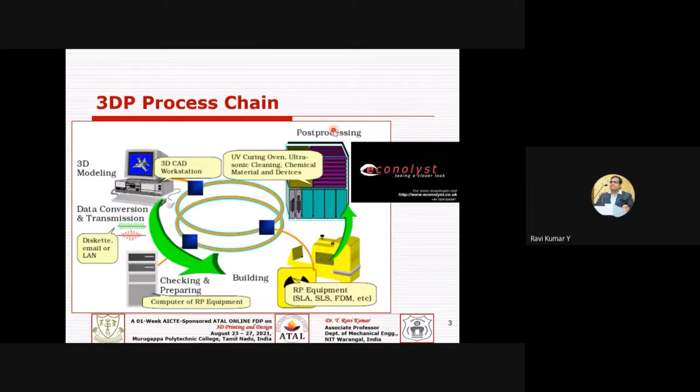Let's elaborate on what we discussed. We need to start with the CAD model, which is the true model or the native representation of your CAD model. For example, .prt or .part, whatever it is, it's a native representation of your model, the true representation.

But at the moment you save it as an STL file, it has been tessellated or approximated into triangles, and you can control the mesh resolution. By reducing your chord height, or reducing the angle control, you can get a more precise representation. That is at the cost of more triangles in the STL file.

Typically it is an STL file, that is the industry de facto standard, right from the beginning. So we need to start with a CAD file with true geometry, and it has been discretized or approximated into a number of triangles, which you can increase by controlling the parameters in your software itself. This is where you start with CAD to STL file, and the next step is we need to slice it.

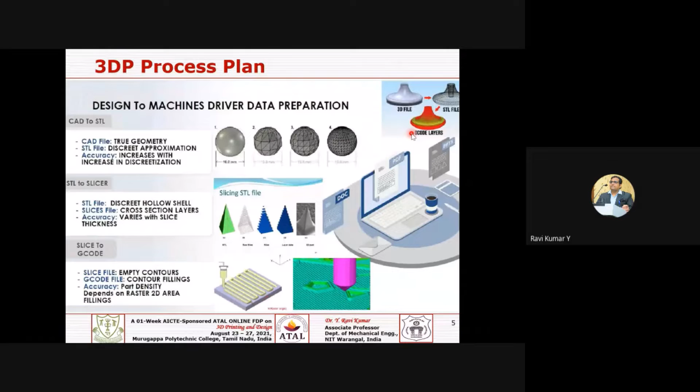This again depends on your layer thickness also playing a vital role. Not only the accuracy, but you need to provide supports here, extra supports. So one can identify or select an optimal orientation in such a way that, without compromising your surface finish, you have a conflict or trade-off between accuracy and build time. Of course we have other criteria to consider, like the amount of support material required in one orientation versus another.

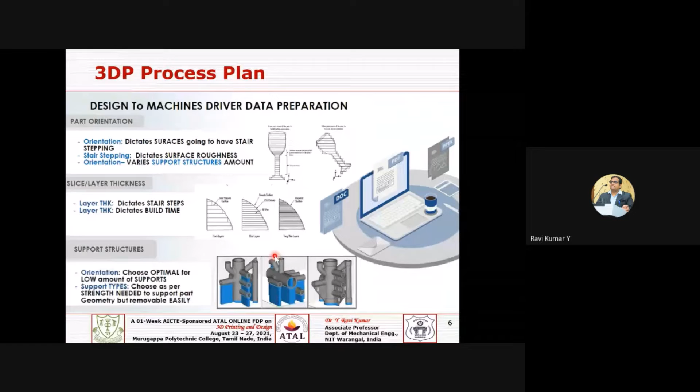The support structure is going to play a vital role even for metal printing technologies. If it's a polymer-based system, you have a different scenario of supports, and if it's a metal printing system, you have a different aspect of how you minimize or optimally utilize the support structure. So these are some of the aspects we can elaborate on regarding part orientation in 3D printing.

We have several criteria for how part orientation is decided, such as the height criterion, meaning your build direction gives minimum z-height, so the number of slices are minimum. If your z-height is minimum, you choose an orientation giving fewer slices — the z-height should be one of the criteria.

Or your surface quality may be another criterion, and the area of the base on which your part is resting, meaning the better foundation, is another criterion for fixing your orientation.

Or you're looking at mechanical properties. Why? Because you cannot expect the same mechanical property if you make one sample in horizontal orientation and another sample in vertical orientation. The mechanical properties never match.

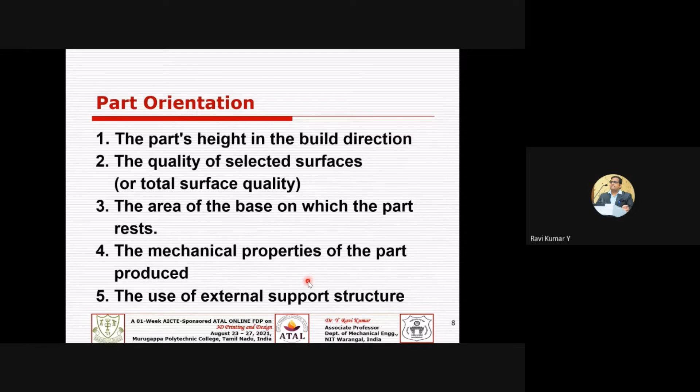So in that case, what could be the optimum orientation for better mechanical properties? And of course, there's your external support structure, as we discussed in the previous slide.

If you take a typical design, you can come out with say 5 different criteria, meaning 5 different orientations. In one orientation it may be maximum area of the base, the better foundation criteria, or it could be minimum area of contact with the supports without damaging your model — because we need to peel out or separate the support from the model, and we should not damage the model in that action.

And even minimum height criterion — minimum z-height means fewer layers, so build time will be minimized — and minimum facet roughness, which is a quality aspect where you can choose another orientation. And we may be looking for minimum volume of support, fixing the orientation based on that.

You may doubt how you ensure which orientation is chosen — software by default may suggest some orientation, normally based on the minimum z criterion, which is more cost-conscious: where the z-height is minimum, the build time is less, and the cost of production will be less. So all of this comes under optimized part orientation.

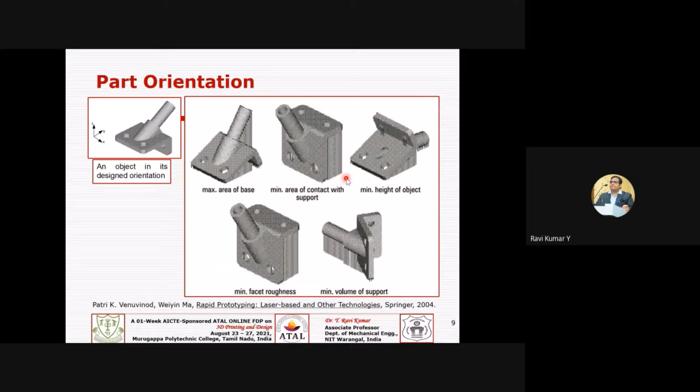If you fix your orientation, your theta angle, at around 45 degrees, and you change the other sample to say 30 degree orientation, keeping the same layer thickness, you can anticipate that the error, the deviation, is much more here than in the previous sample. So one can understand the importance of your build orientation in affecting your surface finish.

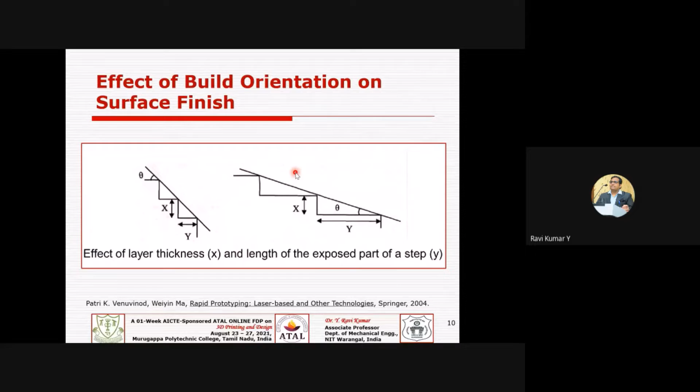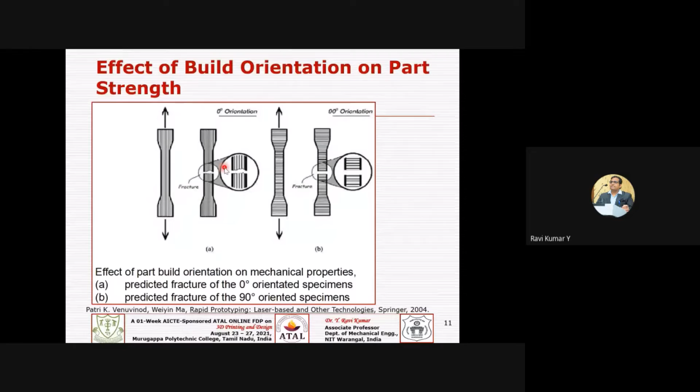So the 0 degree versus the 90 degree orientation, where you have different fracture mechanics. So ultimately your required properties are affected a lot by your fabrication orientation.

And we talk about the cost, the production cost of these 3D printed components. The total cost would be the sum of a pre-processing cost, which includes, say, hiring a design engineer or an application engineer, or software to generate your tool paths, or sometimes, as we were talking about, redesigning some aspects. Your pre-processing cost includes those sorts of costs.

And of course the build cost, meaning the machine utilization cost for building your prototype or your products. And the material cost, that is the model as well as support material cost. Predominantly these 3D printing systems require support structure, 70 to 80% or more, so we need to work on those costs, plus the post-processing cost, as we already discussed.

Post-processing includes cleaning up or removing the support structure, and further improving the mechanical or other physical properties, which incurs a post-processing cost. So maybe furnace treatment or shot peening for improving surface finish and so on and so forth.

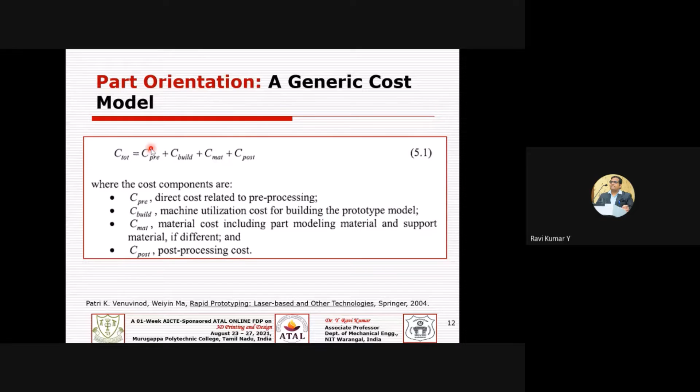Why? Because more or less the machine is automated, so there's nothing much to do on the machine side. Whereas this is the main crucial part of the cycle you do in a 3D printing process. And of course the cost. And then support structure generation, as we discussed, where nowadays this support structure,

I hope the previous speakers talked about various processes, but the support structure will definitely have different outcomes, or it may behave differently. Why? Because sometimes you may work with polymer-based systems, sometimes with metal-based systems, where you have totally different conductivity or rate of fusion of the particles, so with these support structures you may not be able to generalize support structures.

Why? Because each material behaves differently, and sometimes you may use a photopolymerization process, sometimes a powder bed system, and sometimes a binder jetting or a material jetting system or a sheet lamination based system. But you must know about the behavior of the support structure from one process to another.

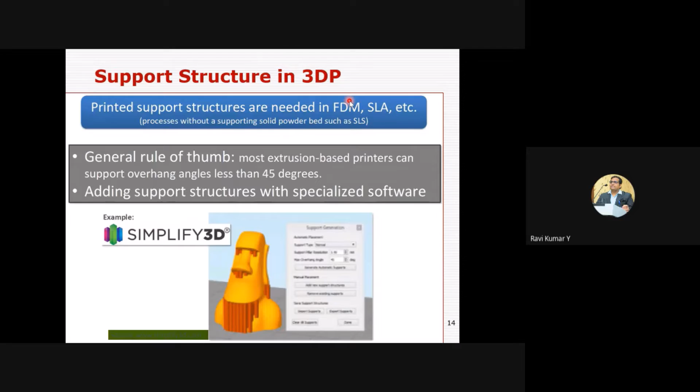And you can come across several softwares to do this job. Maybe Simplify3D, or Cura is another software, which is more or less open source, supporting FDM based or filament fusion based systems. And then if you see the support structures, normally you can divide them into three categories.

The first category could be the separator kind of support, meaning you have the platform where you are going to start depositing the layers. Initially you put some layers, maybe some 10 layers or so, that will directly fuse onto the substrate or platform. You use this kind of separator support where it gives more reinforcement, or a better basement for your part.

And of course you have main supports, which do not directly contact the model, and you have the third kind of support which directly contacts your model material, that is a Sierra or needle kind of support. So you see these supports from different perspectives, and accordingly design and print these supports.

What I'm trying to say is you can vary the infill density, or you can vary the path strategy for different regions. Why? Because you may have a different function for a separator kind of support versus the main support versus the needle or Sierra kind of support. So by considering those aspects, you can design your support in tune with what we need to design and fabricate.

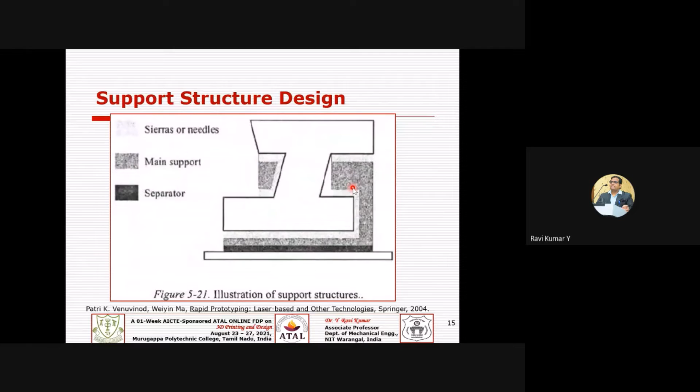And the support structure has not always been a curse for you. Say, for example, you have a separator kind of support here, but you didn't give any support here. Because you have not given a support, you may anticipate some sort of peeling or curling effect of your layers. If you provide some support, you can eliminate this sort of curling or peeling effect with the support structure.

So support structure is not always harming your part; sometimes it may be very much needed. Again, that depends on the type of material and the type of process you are using. Sometimes the support material will act as a conductor in order to dissipate the heat. It may act as a sort of conductor in some situations or applications, so we cannot generalize saying that the support is always bad.

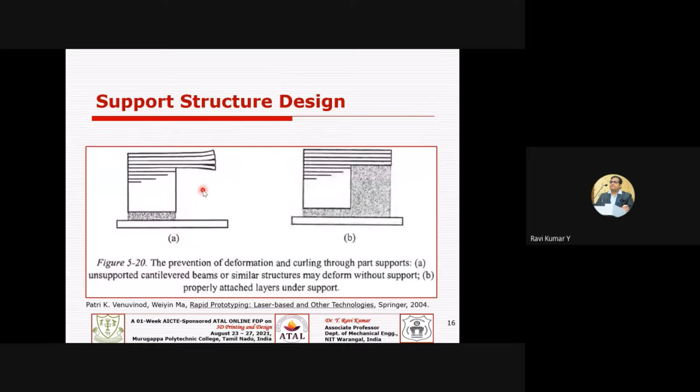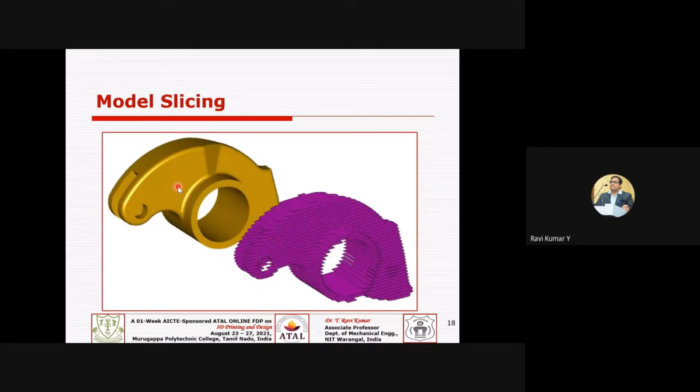And then of course we do slicing and toolpath generation. Once you have set everything, we need to start slicing; your CAD model should be sliced. If you see the mathematics behind this, it is simple math, since we are working with an STL file, which is more or less triangular facets. So it is simple mathematics or geometry involved here.

So of course Z max, the maximum height in Z direction, minus the minimum height in Z direction, divided by your layer thickness, will give you the number of slices that your model consists of. And then how do you get your slice point? Once you use a cutting plane and try to slice it, your cutting plane may be touching one of your triangular facets. Why? Because your model is an STL file. Basically, it is a triangular element.

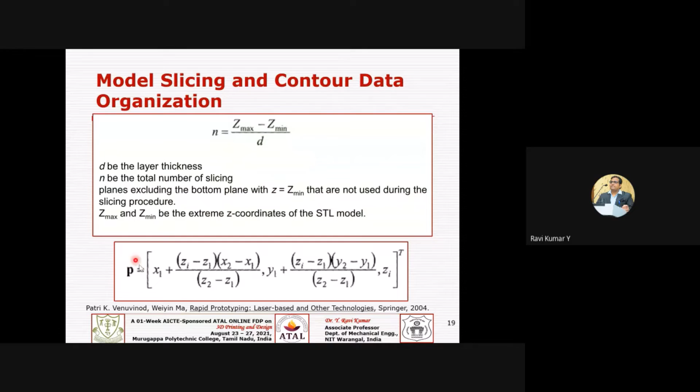So for the triangular element which is intersecting with your slicing plane, you can easily calculate the coordinates of that sliced point, the X coordinate as well as the Y coordinate, at that particular Z layer, maybe at a particular layer number, so you are able to get the coordinates of your slice points. What I'm trying to say is, you have a model STL representation and you have a slicing plane. I'm talking about these intersection points.

So I have intersection point 1 here, for example, 2 here and 3 here, across the periphery. So I have 1, 2, 3, 4, 5, 6, 7, and of course 8, 1 and 8. Only then will it form a closed loop and ensure that it is one contour, or at this layer position you have this cross section. Typically you can have two notations, either clockwise or anti-clockwise, depending on whether that data belongs to the interior or exterior. So initially we can come out with this kind of syntax and semantics.

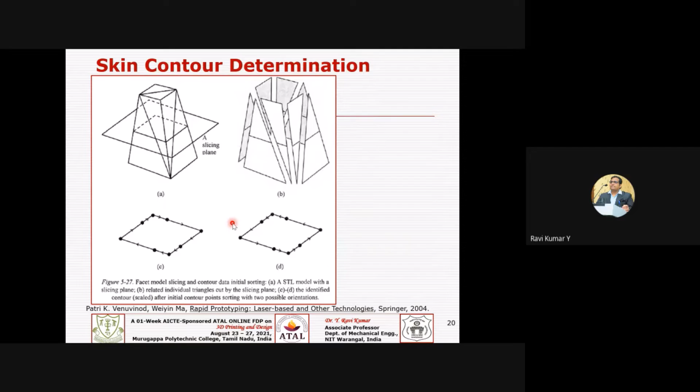Once you get these contours, we need to check for peak features. What do you mean by a peak feature? Say, for example, you're slicing your model and your slice thickness is this much, whereas your feature is of lesser thickness than the layer thickness, the resolution. Then there will be a chance that you will lose this feature; it cannot be recognized. So wherever you have those sorts of peak features, you identify them. You should not lose them.

Then you may adopt a different slice thickness for that, without losing your data. Again, that depends on what layer thickness you are adopting and what minimum feature you can get from that machine, and we need to evaluate that: which machine you are going to fabricate this on, what the resolution of that machine could be, and the minimum feature that you're going to get. So we need to check all those aspects.

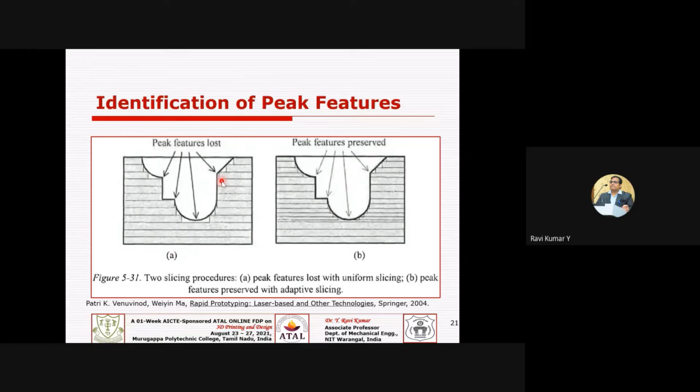Though it is a push button kind of approach, we do agree that 3D printing is all about a push button. You just take an STL file, your CAD model, slice it, and everything is automatic and absolutely fine. But in practice, sometimes you may miss these sorts of features, right? So we have to explore these sorts of gaps that you can encounter.

Once you identify the peak features and have generated the slice points, if you take a particular cross section, a particular layer, you may have several features at that layer. Why? Because it's a combination of different features. That depends on the geometry of your model, of course, and we need to have a parent to child relationship, right? Which part may be the parent and which part could be the child, and how many generations it may go. We need to organize these.

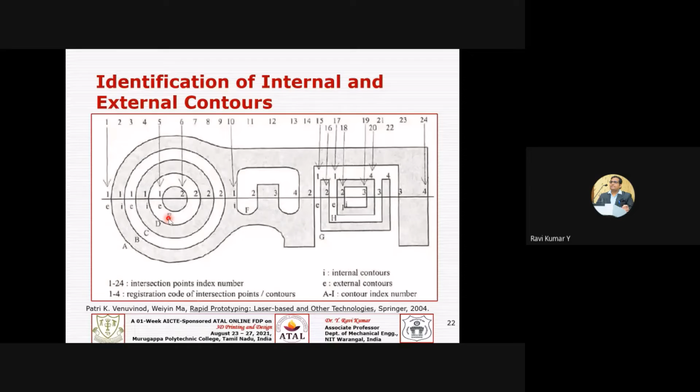You may wonder why I'm saying all this, since your software may be doing it for you; everything will be done and organized. It's fine. So ultimately, the organization of the contours is done for each and every layer of your model. If I have 100 layers, you can anticipate all 100 layers. You organize this data and ultimately we need to send this data, something like your G code, M code data. Now I'm calling this a CLI. This is one of the file extensions you may use. This is basically contour data.

So after slicing and generating the cross-sectional data, now the cross-sectional data is in this format, where it consists of how many layers a typical design has, and the first layer. So it consists of everything, right? The index number, the layer number and the Z coordinate of that current layer. And this starts with the first layer.

So I have some 10 contours at a particular cross section. Then the first contour, I may have the contour number, whether it's closed or open, whether it's internal or external, or even it could be a father to a child, some sort of hierarchy, and the number of contour points for the first contour, and of course the coordinates of that.

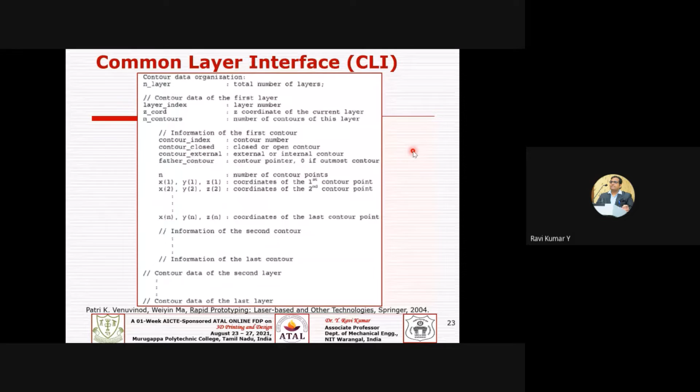So the coordinates of that, and that is one contour, and typically it may have several contours, and the information about each and every contour, second contour, third contour, and the last contour. And that's about the first layer. Then go to the second layer, and the same thing will be repeating. Depending on the geometry you have different contours with the second layer, up to the last layer, right? So this is basically polyline data which is fed to the machine to run the show, right?

Why am I talking about this? Because it will dictate a lot on the outcome of the product, maybe the density or the mechanical properties, which will vary from one toolpath strategy to another. So then it is our job to come out with optimum utilization of these toolpaths. So what is the requirement? What sort of application is your product for, what sort of design requirements, and based on that we need to do all this exercise, right?

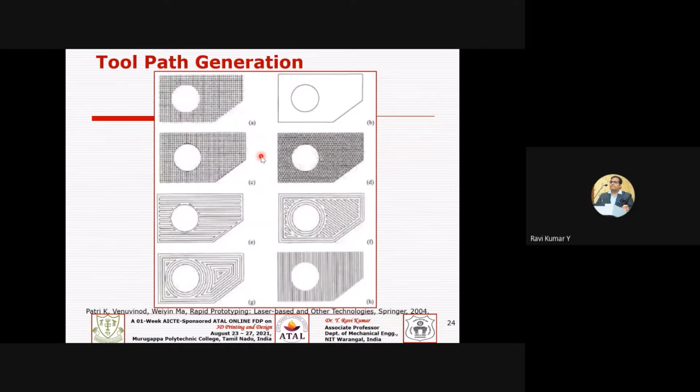So we talk about the mesh repair and slicer tools. Typically, the mesh is a triangular mesh. I'm taking only the STL file, and of course some slicer tools. You can find some proprietary software to do this job. Why do we need an STL editor, or STL modification, or diagnosing your STL file, as we discussed previously? Unfortunately, your CAD system doesn't have this diagnostic mechanism, nor does your interfacing software. So you may adopt some third-party software which will even allow you to do STL editing.

So first of all, why do you want to edit the STL file? As we discussed, maybe some errors, or some text should be put on it, for labeling, visualization, or measuring purposes. You may have a doubt: you can take the measurements on your CAD file, right? You are correct, but you cannot take measurements on an STL file. Once you save it as an STL file, it becomes a static model. You cannot do many of these operations on your STL file.

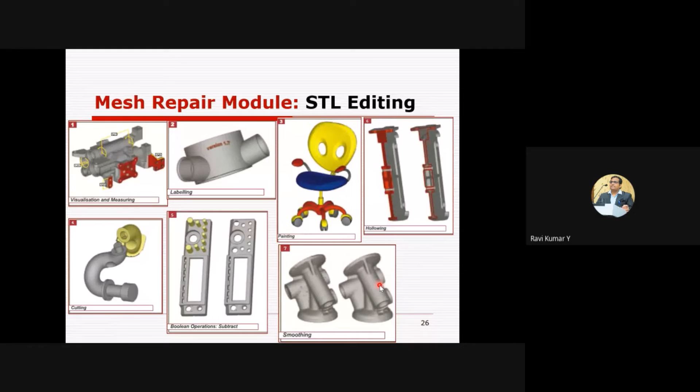It might have been taken from reverse engineered data or some sort of thing where the surface badly needs some smoothing of your models, and even that will be performed on these sorts of tools or software. Or sometimes we need to visualize in a better way. You have some hinges or wherever, then we need to give them different colors.

Or we need to invert the flipped triangles. You have a triangle and you have a normal, so the normal should be projecting outside. But sometimes some triangles or normals may be flipped, which we need to invert back. So we need to flip back either a triangle or a normal for that matter.

And you have certain stitching features where you can automatically stitch if some triangle is missing, mismatching, overlapping or intersecting. You may wonder why it should happen. You have done your modeling in a very nice way. Yes, I do agree, but your tessellation algorithm may not be robust enough to represent your model in a better way in the STL file.

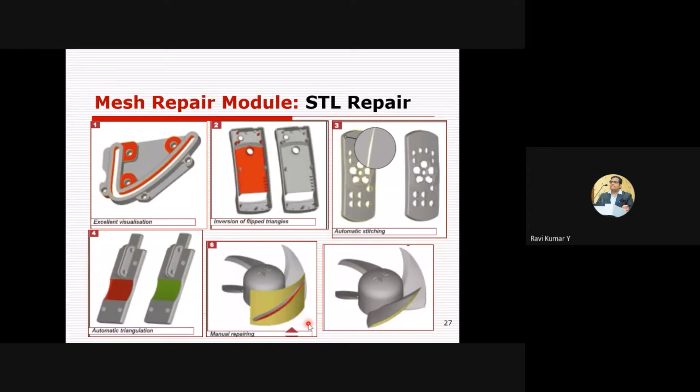So obviously it may have these sorts of errors or problems which we need to rectify further, maybe by adopting these sorts of tools. And some automatic triangulation or some manual repairs can also be done through these tools. And in addition to that, support structure generation.

You may wonder whether the supports have already been done in the software which is interfacing with your 3D printer. Yes, you are correct. But you may have other tools which give more options that may not be available in your software, or it may not be customized as per your requirement many times. So then you can adopt these support structures.

As per your feature, say I have a large surface area which I need to support. For that I need to go with a block kind of support; simply I can pick a block support, and it will fetch me a large surface sort of feature. Or sometimes my feature is very narrow, and in this case it is not advisable to go with the block support, so I can go with the line kind of support.

Or I have a very small feature, but it requires some support, so then I can go with the point kind of support. Or on some other occasion I have a large overhang, so then I need to go with the gusset kind of support. Or I have a circular cross-sectional feature that needs support, so then I can go with the web kind of support, something like that.

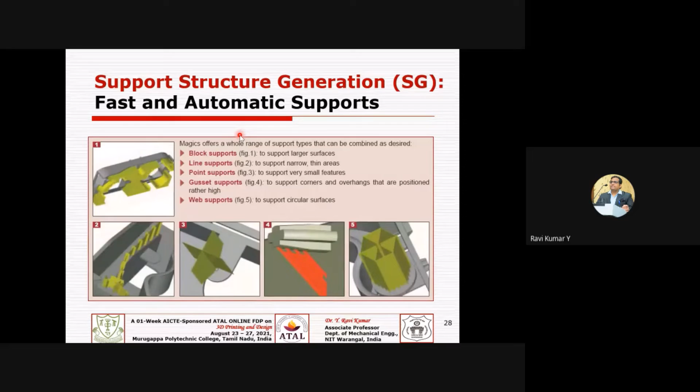It can have many other options too. If your inbuilt software has it, that's fine, we can make use of it. But if you are looking for more options, it is also possible to get it done through these tools. And of course the slicer software could be open source or proprietary, whether it is an SLA or VAT-based system, or an FDM-based, that is extrusion-based, system.

You can go with free software like Cura or Repetier, or Slic3r, or plenty of software which comes free of cost with a slicer module to slice your STL file, OBJ file, X3D, 3MF, AMF or any sort of file format you are trying to slice.

So basically that is pre-processing. You have design and pre-processing, generate a G-code and send it to the printer. So that is the typical G-code which you can come across. Your slicer, which creates the tool path, is more or less intelligent.

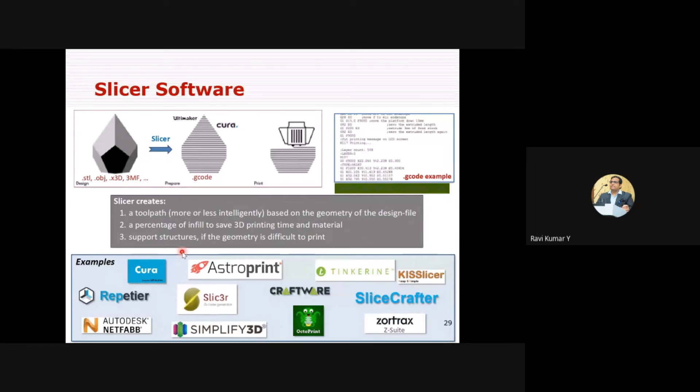Based on your geometry, the file that has been designed will have an infill percentage to save 3D printing time and material, and support structures if necessary. All these aspects are taken care of by your slicer software. More or less, it is now open source, and that depends on what sort of printer you're using. So based on that, you can pick.

To name or list some STL repair software or tools, there are plenty. Some may be proprietary like Magics, or open source like MeshMixer, NetFabb, MeshFix, MeshLab, and other STL repairing tools. Of course, slicer softwares like Cura, Simplify3D, are also open source, but they may not work for all seven 3D printing technologies. At least they'll work for one or two technologies which they support, which you can use.

Otherwise, your vendor or supplier may give you this sort of slicer software along with the machine.

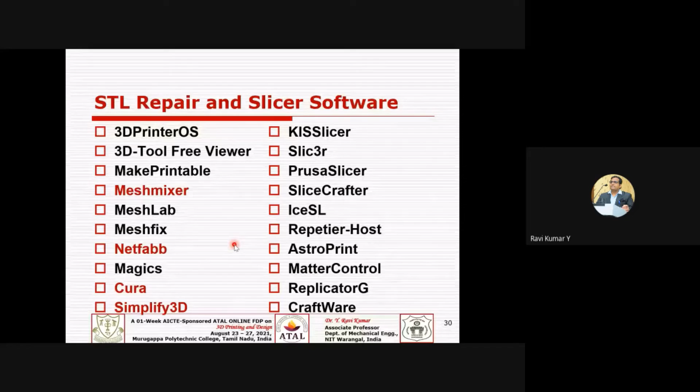Coming to the other aspect, topology optimization and bionic designs. Topology optimization nowadays is a very well-known design optimization criteria, where you can come across these topology optimized structures right from the aerospace industry to automobile or other industries, using this sort of topology optimized structures for less material usage.

Or even you may come across a sort of generative design, where you can consolidate parts. Say you may have 8 components consolidated into a single part. That is generative design.

Or even it may be a sort of bionic design or lattice structure, inspired through biological structures. So it could be that in the designer's mind, where he or she wants to make more lightweighted structures.

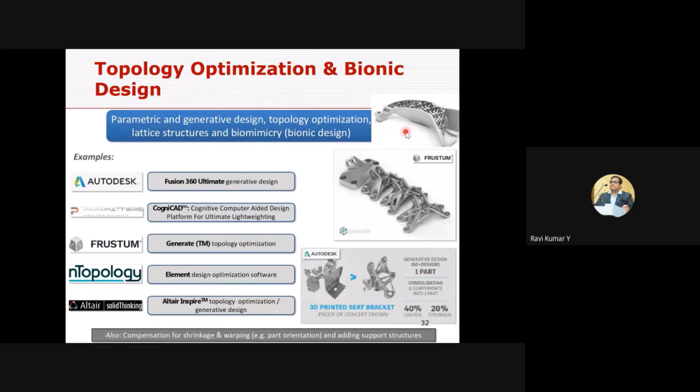But how do you get your optimized structures fabricated? Definitely, 3D printing technology is the one solution to get maximum benefit out of these bionic designs or nature-inspired designs.

Coming to the various softwares or tools available, you can find several. Just to list a few here: Altair OptiStruct, or Abaqus Atom, or MSC Nastran, or you can use several other tools. You can find proprietary or open source softwares, but majority may be proprietary softwares, which you can make use of to design your things.

Further, it should be tuned as per your 3D printing machine or the technology you're going to use. You cannot just send it straight to the 3D printing machine, because we need to consider the constraints of the machine, which we'll talk about in the next couple of slides.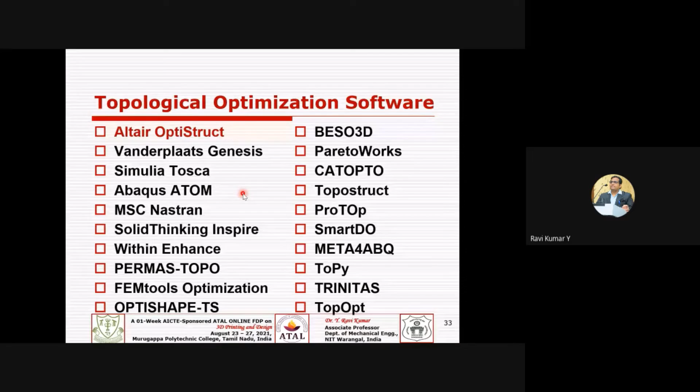You have the topology optimized structures which you can simulate before sending to the machine. This is a typical 3DXpert software from 3D Systems for metal powder bed based systems, where you can do multi-physics, multi-scale modeling of the 3D printing process.

Why do you want to do this simulation? The same logic you can extend, where you can find out some sort of errors or defects, like model distortions or residual stresses within the layer or at the interstitials of two adjacent layers.

We need to reduce those sort of errors or defects in order to compensate your distortions, or warpage and shrinkage compensations, which you can even simulate. You can also do modeling of support structure optimization to have a lattice kind of structure, or a point kind of support structure adopted here.

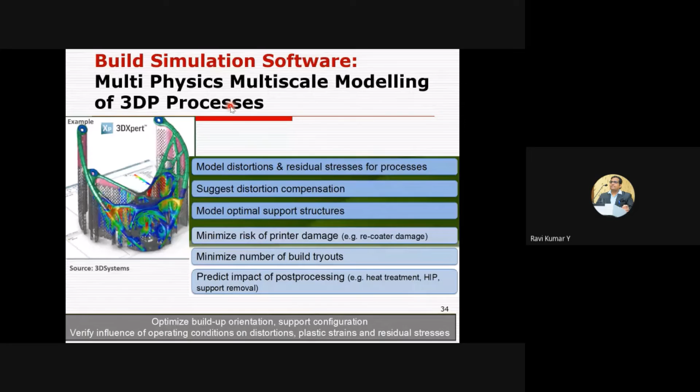And the next part of my presentation: how do you select your 3D printing technology? So of course, by material—because you cannot process all materials in a single printer. That is another constraint which we need to talk about.

If you see the material choices, you can go with polymers—either thermoset or thermoplastic—or metal alloys, ceramics, composites, functional materials, electronic materials, shape memory materials, biologic materials, or food or construction materials, or anything other than engineering materials. Even it will be supporting other materials too.

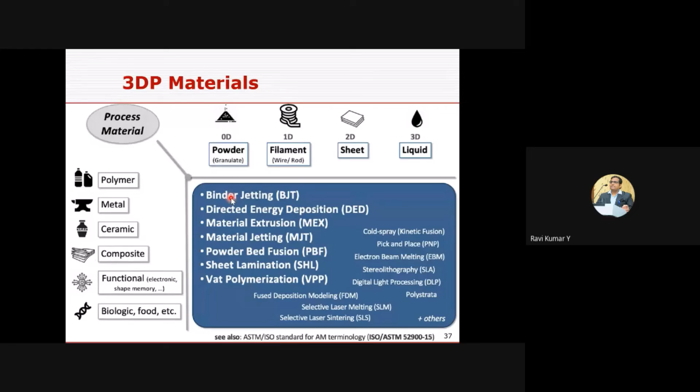And of course, materials broadly like polymer, thermoplastic, thermoset—you have material jetting or SLA or DLP which is quite convenient with thermoset kind of resin, epoxy resins, photosensitive polymer resins. And you have thermoplastics like ABS or nylon, which you can process through SLS or FDM technology. Or metals—you have a lot of metals, and even sand or ceramics, composites also—not included here, but nowadays a lot of developments are happening. So you have a good number of material choices in recent times.

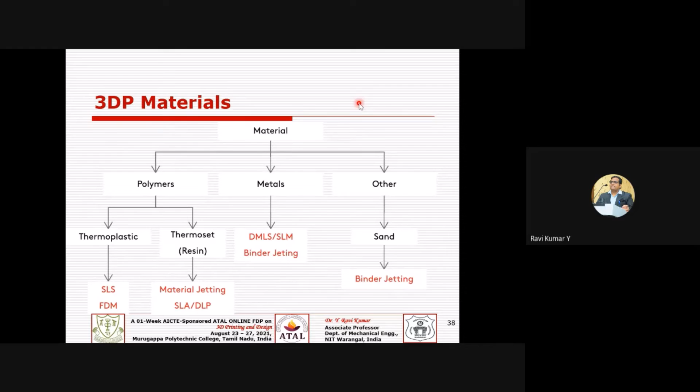And application-wise, how do you select your technology? For that matter, let me first give you an overview of these 7 processes.

From the perspective of feedstock—either liquid, powder, or solid as I mentioned—you have the 3D printing or additive manufacturing principle. It may work sometimes like a polymerization process. Sometimes the technology works with inkjet printing or binder jetting, simply liquid jetting, or your powder is atomized, or powder is melted and solidified, or simply joining, maybe a filament or a sheet, so it can be joined.

So you have different principles that you're going to apply, and of course the respective feedstock forms, and you may use an appropriate source of energy - maybe laser, maybe electron beam, maybe plasma sometimes, or maybe simply a jetting technology, or you can use some catalyst. Then you have these principles, and of course the 7 processes. I'm not going to talk much on this, but just give an idea of how these principles of working and the processes in a nutshell.

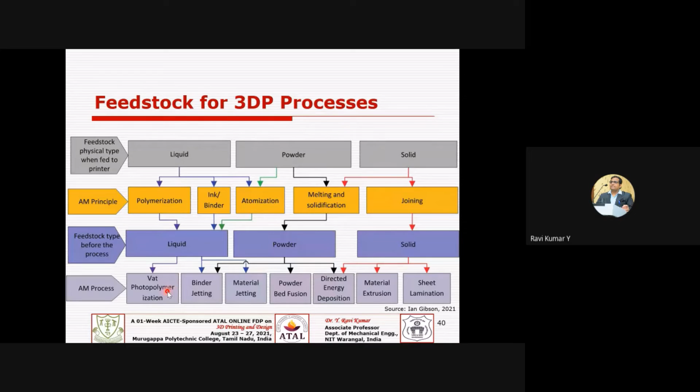That's what this is. And then functionality wise, application wise - say if you are looking at some form fit applications, then what could be the tolerance range you are looking at, and choose an appropriate technology as per your required tolerances. Why? Because not all the machines will give the same tolerance values.

So then we need to select an appropriate technology for your right application - whether high strength applications, maybe less than 30 MPa, or 30 to 85 MPa, or greater than 85 MPa. Then you have to select these processes based on your application.

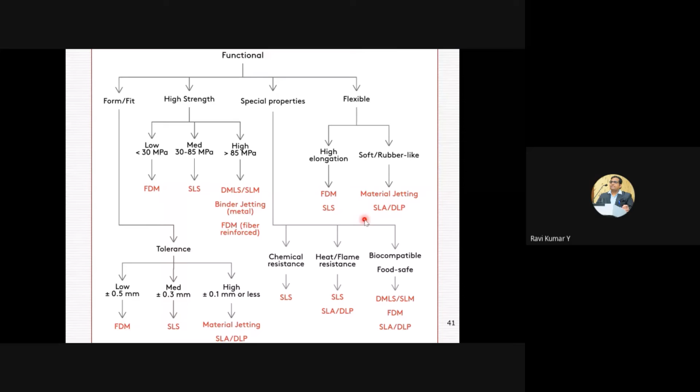Special properties - you're looking at some chemically resistant material, or heat resistant, or flame resistant, or biocompatible, or flexible material, high elongation, or soft, or rubber or elastomer kind of material. Then you can choose an appropriate technology for your right application.

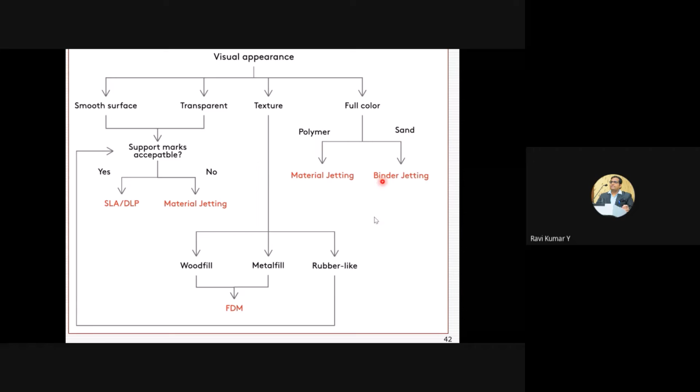Sometimes your application demands good visual appearance with smooth surfaces, or sometimes it may need to be more transparent, then you may choose an appropriate technology. Or you're looking at some textures - wood fill textures, or metal fill or rubber like, or full color capability, maybe in polymer, maybe in sand. Then you can use material jetting here and binder jetting here. Appropriate selection should be done.

And the last part of my presentation talks about the design rules for 3D printing. So the design rules - you can take some standard features, and then how do you come out with some sort of general design guidelines or rules?

So like that, even the next slide will talk about the other processes also. But what I'm trying to say is, based on your feature, we need to check the capability of the machine. Some unsupported wall should not go less than a certain value for a particular machine - we need to know this. Otherwise, if your design consists of less than this dimension, you cannot realize that sort of feature, and you may end up blaming the technology or the machine, saying this machine is not giving this feature. So we need to understand these constraints for each and every process.

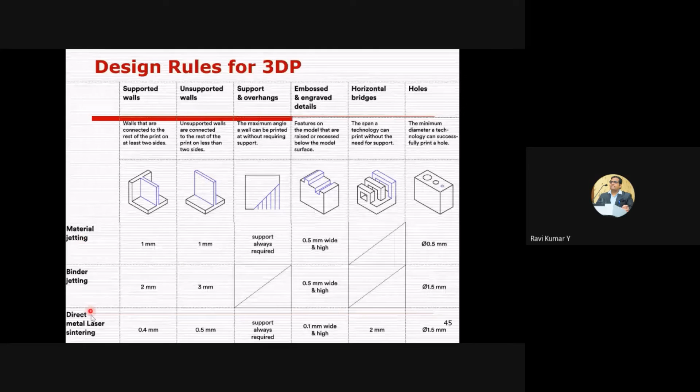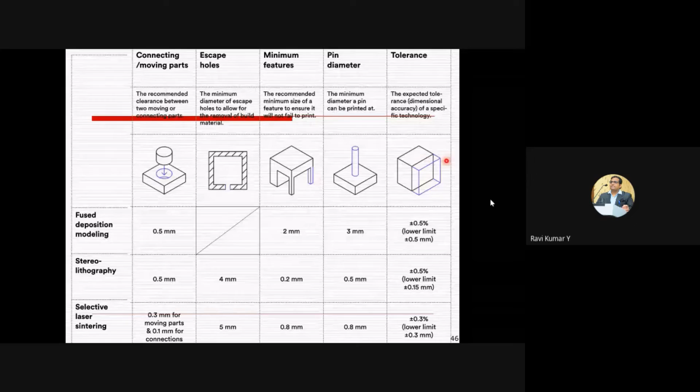And for other processes, the same features which you can have versus your features, which we discussed. Similarly, you may have some connecting or moving parts, so the value may go differently, and some escape holes that we need to provide in order to remove your build material. If it is tedious, if you're working with a powder bed system or a VAT based system, there will be a chance of your raw material escaping into your component. So there's some minimum feature size, minimum pin diameter tolerances, and you can see the subsequent processes and values for that. I will be sharing this PPT, you can go through it afterwards - this I picked from a handbook of 3D printing.

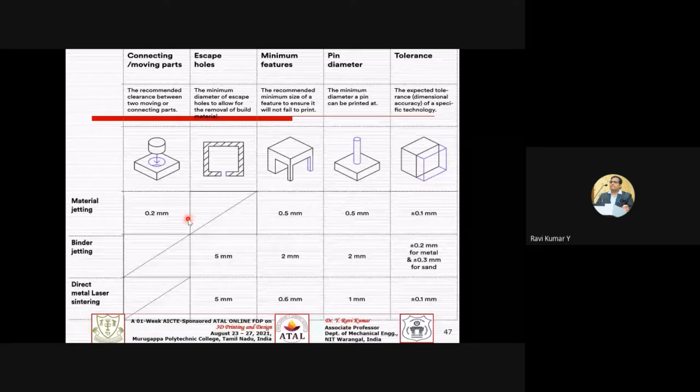And we can refer to some of the labs, the C labs from, say, Purdue University, that is REID, the C Design Lab. They have developed a sort of matrix where they have divided the design of any additive manufacturing system into different categories, like complexity, functionality, material removal, unsupported features, thin features, stress concentration, tolerance, geometric exactness.

So you can run your design against all these measurements, then you will get a score once you run through this test. If the score is, say, 6 to 15, you may not be much worried about the manufacturability using the additive manufacturing process.

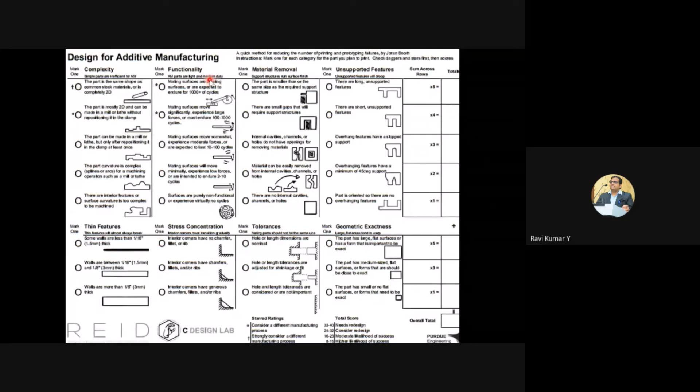But if your score is between 26 to 32, we need to strongly consider redesigning your product. Or if your score is much higher, like 33 to 40, it definitely needs to be redesigned, because you will have difficulty manufacturing it through AM or 3D printing technology. So you can find these sort of avenues. And then why don't you have a set of standardized rules?

Why? Because you don't have many standards. Standards are derived from ASTM or ISO or other organizations. That is the major challenge of 3D printing, to standardize products made through the 3D printing process. As of date, there are maybe around 35 standards from ISO as well as ASTM, in terms of design aspects, terminology, fabrication, or feedstock. Very few are available, but maybe around 70, 75 are under development.

So why I'm talking about all this is, if you have some set of standard rules saying you follow this, you follow that, our efforts will be minimized. Otherwise we don't know whether we are going on the right path or not, right? Unless you have some checks and balances comparing with the standards. That is lagging, of course, in 3D printing.

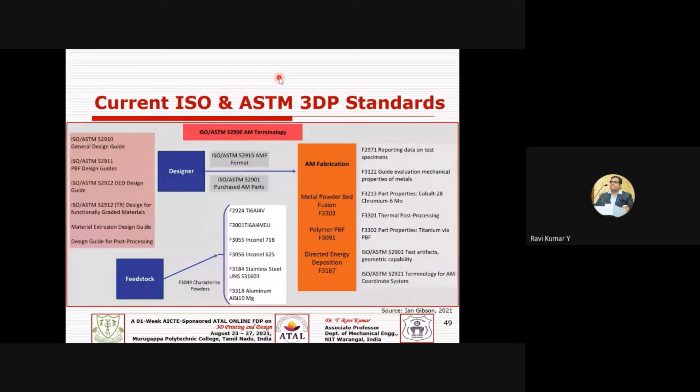So let me summarize what I have done for the past 1 hour 30 minutes or so. We talked about the importance of 3D printing design, some 3D printing tools and software, and process planning of 3D printing, like part orientation and how it affects your quality, support structure generation, mesh repair, slicing tools, and tool path generation algorithms,

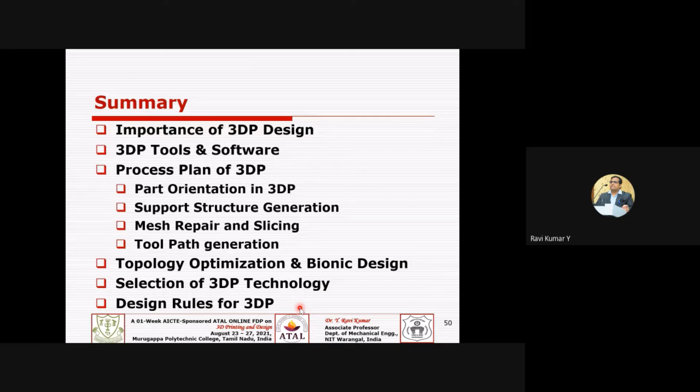and topology optimization and bionic designs, how they can be achieved through 3D printing, and how to select your 3D printing technology, either based on the material or based on the application. And we briefly talked about the design rules for 3D printing. So this is what we have talked about during this session.

And these are some of the facilities we have at NIT Warangal. We have a metal 3D printer from 3D Systems USA, the DMP Flex model, a couple of Stratasys FDM based printers like the Dimension series and Mojo series, desktop printers like the Ultimaker 2 Plus, EinScan and Sense scanning equipment, a muffle furnace for post processing of metal 3D printed parts, and a shot peening machine to improve the surface finish of metal 3D printed parts.

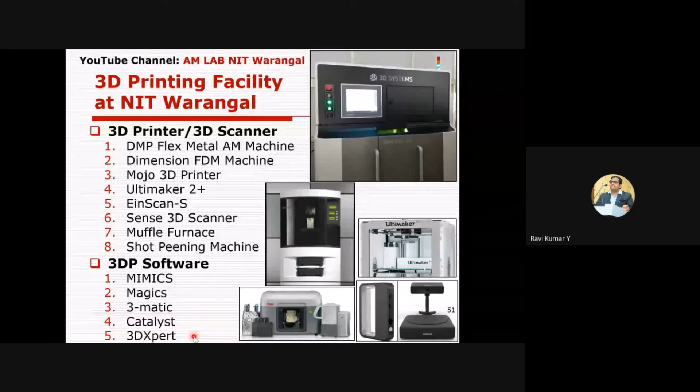And we have dedicated 3D printing software, for medical image processing and design of implants, where we work on how to customize medical devices, patient matched or personalized. These can be designed through Mimics and 3-Matic software, Magics for STL modifications, Catalyst to run the Stratasys machines, and 3DXpert to simulate metal 3D printing for powder bed systems. So these are some of the facilities we have at NIT Warangal.